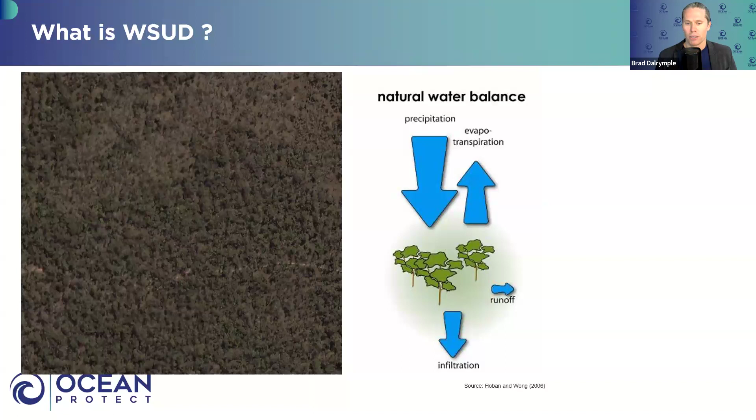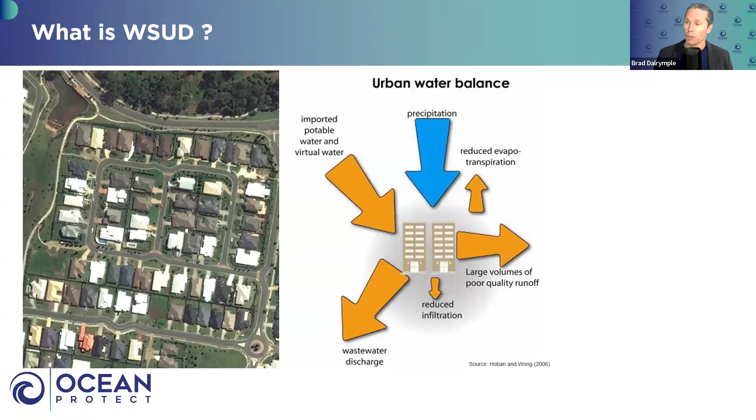But obviously, when we develop an area, when we put in roads, houses, etc., and often knock down a whole bunch of vegetation, we very much change the water balance. In terms of stormwater, but also equally, we require potable water to come into our urban areas, and we generate a lot of sewage as well. So the water balance fundamentally changes.

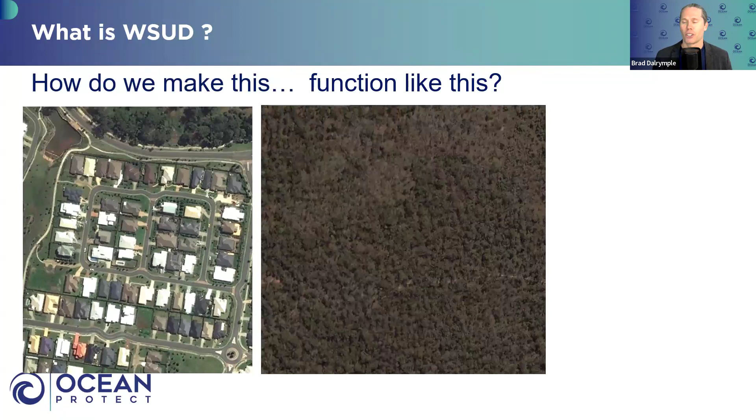So fundamentally, when we're talking about water sensitive urban design, we really want to make this function more like the natural catchment. And how do we do that? That's essentially what water sensitive urban design is trying to do - to get our urban environments to have a closer resemblance, from a water perspective, to our natural pre-development conditions. That means stormwater management, stormwater treatment, stormwater reuse, promoting infiltration into the ground, and ideally reducing our wastewater discharges and potable water consumption.

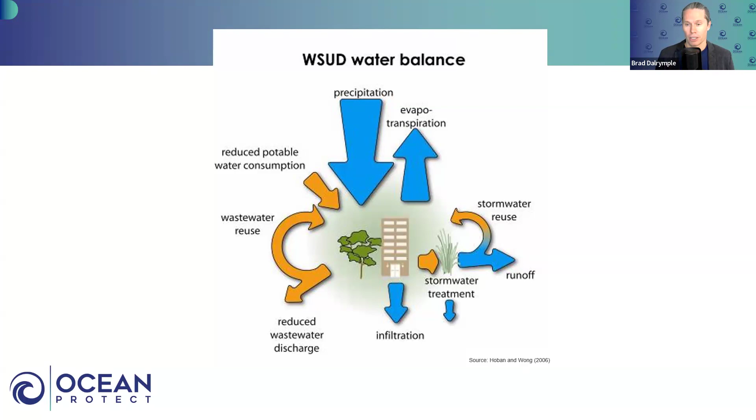There's a whole bunch of things we use potable water for that we could use other sources for instead - for example, toilet flushing, irrigation, etc. It's worthwhile noting that water-sensitive urban design isn't just about stormwater. There's a strong focus on stormwater, and I'll talk about a lot of that today, but it's just one element of the water cycle. So when it comes to water-sensitive urban design, we're really trying to achieve total water cycle management - minimizing potable water consumption and wastewater discharges as well.

Apologies in advance if you hear a couple of dogs in the background - I've got 4 at my feet as we speak. And it's also worth noting that water sensitive urban design is just one part of ecological sustainable development.

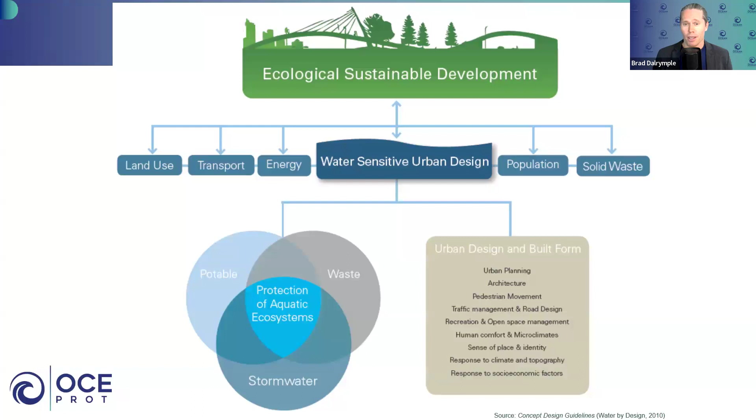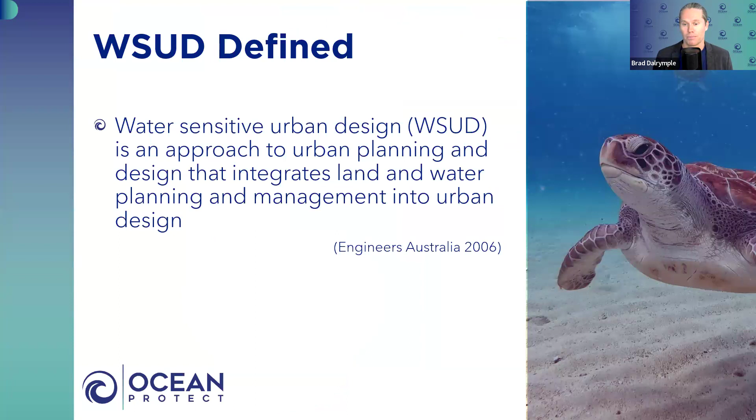But what is it in terms of its definition? This is straight out of Engineers Australia: water sensitive urban design, often shortened to the acronym WSUD, is an approach to urban planning and design that integrates land and water planning and management into urban design. So basically it's an approach, a philosophy - it's not an individual asset or series of assets, it's a way, an approach.

So why is it important? Well, if I just look at where I'm calling from today, in Southeast Queensland - apologies, I'm going to turn some dogs off, hang on. Apologies in advance for the loud dogs.

So in Queensland, in Southeast Queensland, we've gone through some major challenges, particularly in relation to climate change. Wivenhoe Dam just recently was down to critically low levels - we almost needed to truck water into our urban environments. Then shortly after, we went through a period of significant flooding, and then more flooding. Obviously climate change is playing a role there - we are basically seeing our climate change, with more extreme weather conditions, more flooding, more extremely hot conditions, etc.

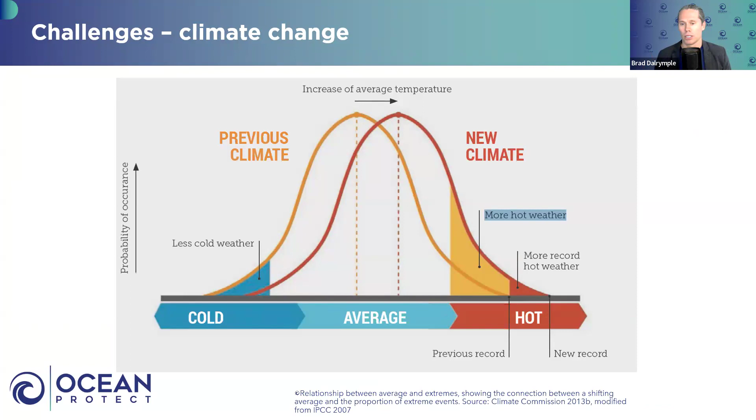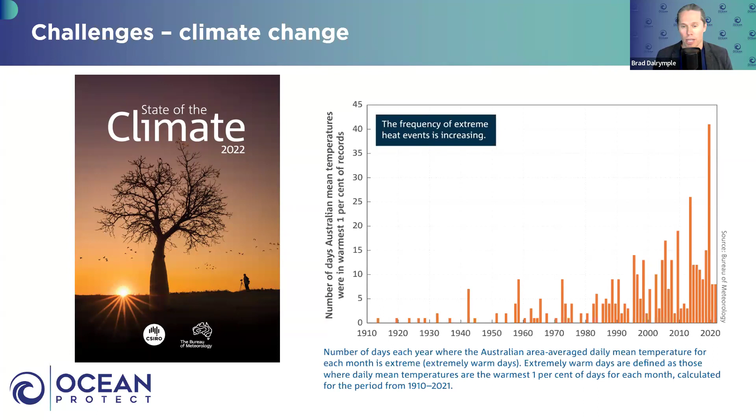Also, we're seeing an increase in the number of extremely hot days. This is straight out of the Bureau of Meteorology and CSIRO State of the Climate Report - long story short, we are seeing an increasing frequency of the number of hot days. So what does that mean? That means more pressure on our health services. Sure, it makes it easy to get out of bed on a cold winter's morning, but it also means a greater amount of people suffering from heat-related illnesses, which causes all sorts of dramas.

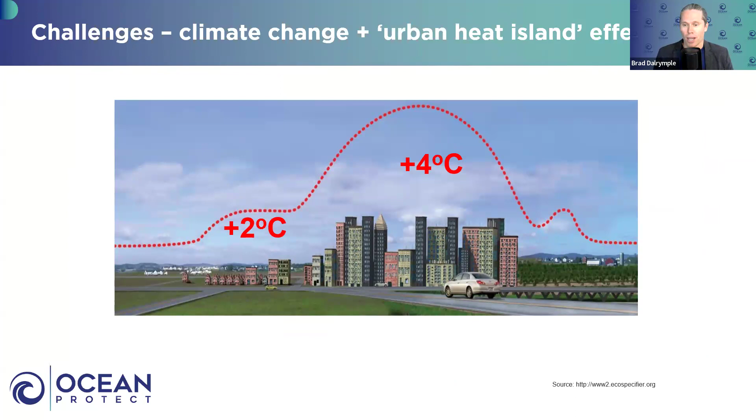Equally, we're seeing the biggest heat impacts in our urban environments, particularly related to the urban heat island effect - basically our urban environments are essentially hotter than our natural environments because of that increased imperviousness, etc. That only exacerbates the increased frequency of heat-related illnesses as well, and that's a massive issue. Some of our most highly populated, fastest growing areas in Australia are probably the most heavily impacted by the urban heat island effect and climate change.

Particularly in relation to Western Sydney, which is potentially Australia's fastest growing area, there's predictions that it might be unlivable to live there. So some of our fastest growing areas with the highest rates of population growth may actually be too hot for people to live in, which is a scary predicament to think about.

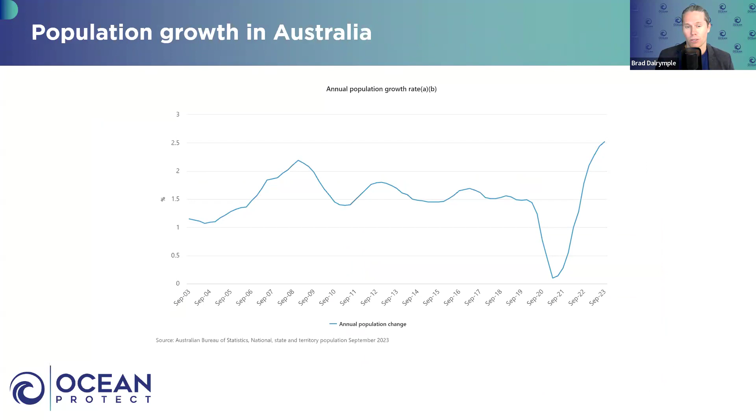So a lot of challenges, but equally, people still keep coming to Australia. I mean, why not? Population growth is still high. Obviously we saw a downturn in COVID, but people are still coming to Australia. Population rates are remaining fairly steady.

In Southeast Queensland, as an example, we have a pretty snazzy ecosystem health monitoring program. So the Healthy Waterways guys, or I think it's called Healthy Land and Water, have been collecting ecosystem health data on a bunch of our waterways and determining their condition. This has been going on for a very, very long time, and fundamentally we are seeing a decline in the health of our waterways.

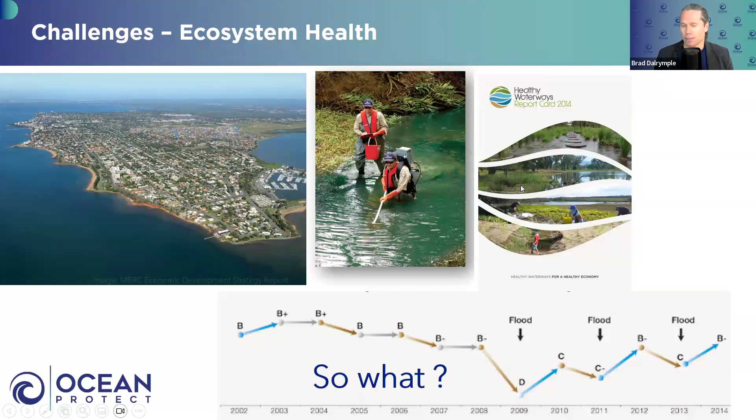And you might think, so what? Who cares? Does it really matter? Well, let me talk about that.

And you can imagine the potential economic impacts associated with the deterioration of the health of any of these waterways. So again, even if you only care about the dollars and cents, economic drivers for protecting our waterways are significant.

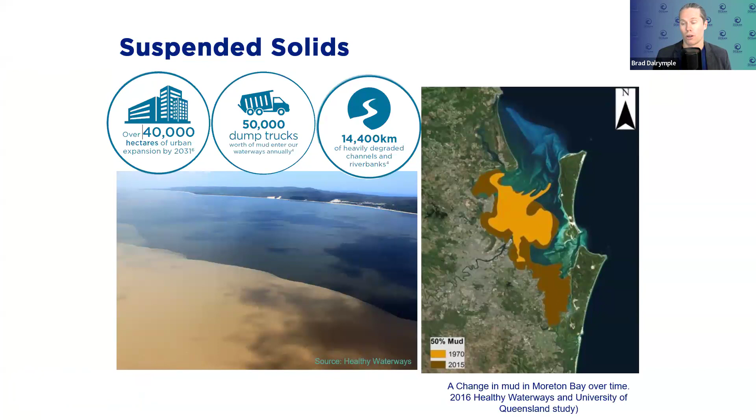And then obviously there's a whole bunch of social and cultural values - that's where basically near, or in, or on our waterways is where a lot of people spend their spare time. Obviously there's a whole bunch of ecological values for our waterways, and essentially water quality or pollution or other stormwater related aspects impact the health of our waterways. So whether it's litter, whether it's nutrients contributing to excessive algal growth and eutrophication, or whether it's just plain old dirt discharging to our waterways and bay environments, these have real ecological, economic, and social and cultural impacts when we don't protect our waterways properly.

And you might think, still don't care. Do you think the Australian public cares? This is one of the questions I asked you guys in the poll. Okay, do you guys care? Do you guys care about the health of our waterways?

There's a lot of things to care about when it comes to increasing population growth, but how do things compare? If I look at the poll, I'm just going to try and get the poll up myself. I'll leave the poll open because I can see something like 200 people have already answered these poll questions. So the first question I asked was basically this: with increasing population growth in Australia, what impacts are you most concerned about?

And Daniel can see the results as I can. But interestingly, the top ones - okay, I'm looking at 61% of people have said less green space is the top one. Interestingly, housing density at 54% is second top. They're live results, everyone's putting them through. Interestingly, marine and waterway health is 49%.

So I'll leave those polls open just for everyone's benefit. Please keep on putting your answers in.

But the reason I ask this question is because it's actually a survey that we commissioned - Ocean Protect commissioned a few years ago. We set the questions and we got an independent survey company to survey 1,000 people across Australia, all demographics, all age groups, and we asked them that question. So I'll show you the results because this for me was really interesting. This is the results of what the survey recipients thought in terms of what impacts they were most concerned about. I'm going to show you from lowest priority to highest.

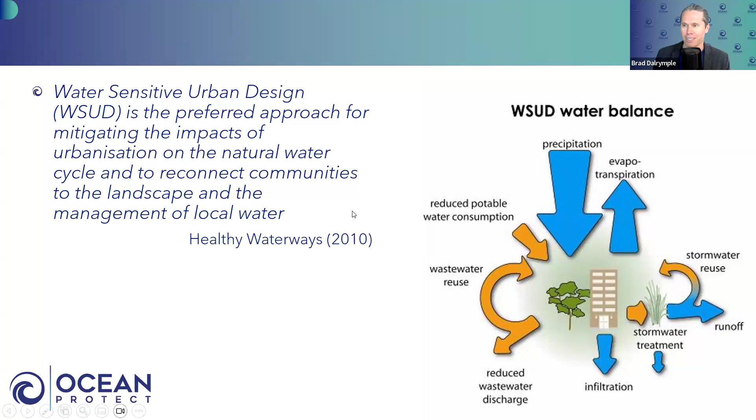Cool. Have I convinced anyone that it's important yet? I'm hoping I am. I'm hoping I have.

Best practice targets. Let's talk about those, and why they aren't really best practice targets.

There's a whole bunch of regulatory drivers for the stormwater management targets. In Queensland we've got state planning policy, environmental water policy, etc. Each state has their own similar legislative drivers, and sometimes they do vary from state to state and territory to territory.

In Queensland, similar to other parts of Australia, we have targets around both construction phase stormwater management - erosion and sediment control, which you'd see whether you're in Victoria, Tasmania, South Australia, etc - and post-construction or operational phase stormwater management objectives. They generally look something like the 80-60-45 or 85-60-45 targets, which reduce the pollutant loads discharged from a particular site.

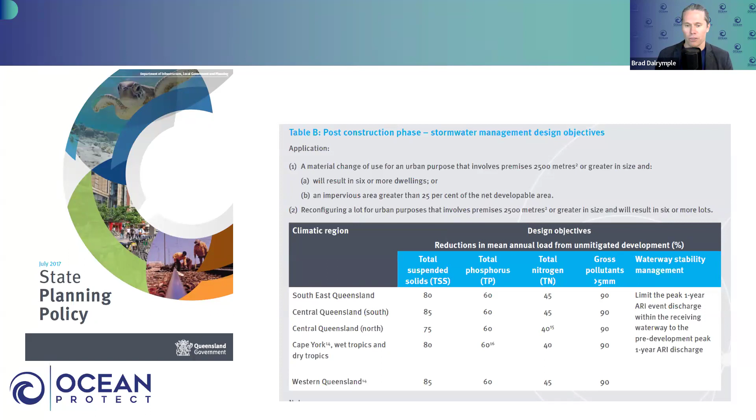They look at average annual loads, so you'd run a MUSIC model or something similar and work out what you need to reduce the pollution generated from your site relative to the development without any treatment devices. I'll come back to why that's important in a sec. In Queensland the targets might vary a little, and in different states they vary too, but something fairly similar to this is used.

What are they based on? It's a bizarre thing to talk about, but fundamentally, and there's a lot of discussion around this, they're based on how big, or what is practical to achieve on your site, for a bioretention system. The most stock standard approach to meeting stormwater management objectives, from my perspective at least, is putting in bioretention systems, and the targets are based on what's a reasonably practical target to achieve using them.

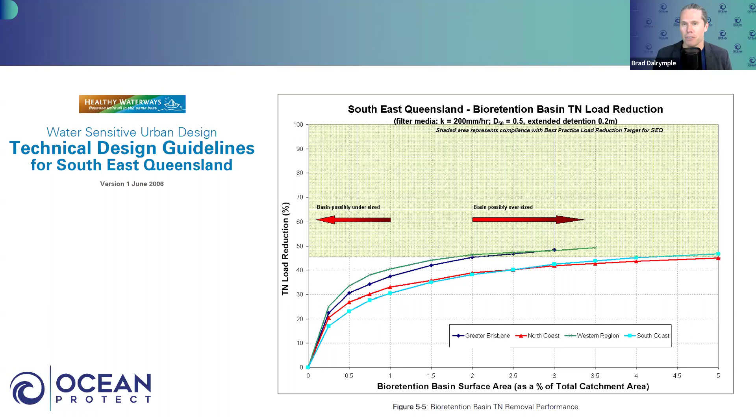Again, straight out of the Healthy Waterways Guidebook, our main capacity building organisation in Southeast Queensland for water sensitive design - they've changed their name a few times since this document was produced - the 80-60-45 targets, or similar, are based on how well bioretention systems can improve the quality of urban stormwater runoff without the treatment systems being excessively large.

The targets do not necessarily achieve a no-worsening of pollutant loads compared to current or pre-development catchment conditions. So again, the targets are based on what's practical if you use bioretention systems.

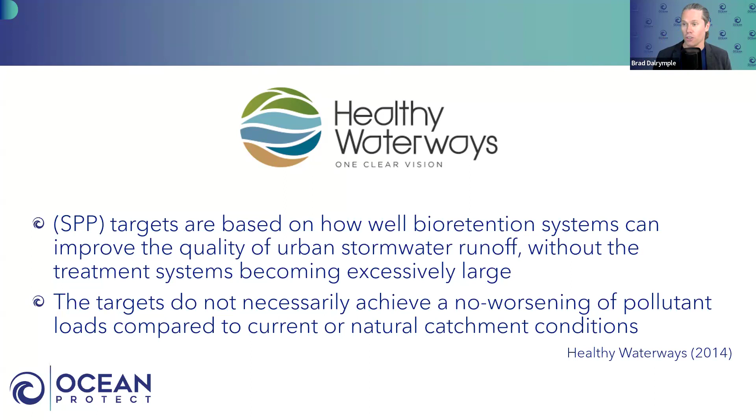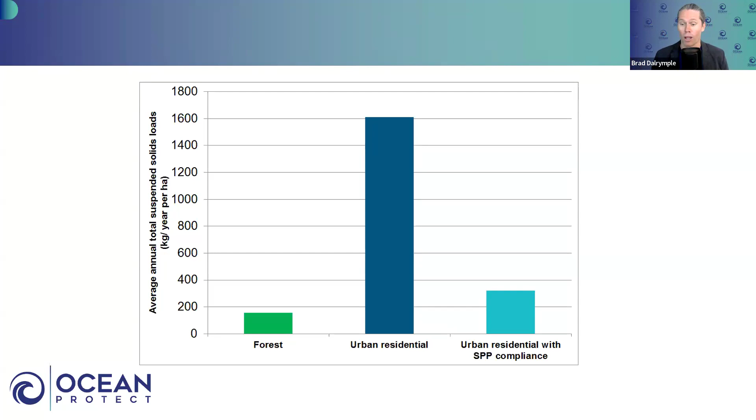Just to prove a point, these are results of some MUSIC models I've done for a conceptual 1 hectare site in Brisbane: a forested land use scenario, an urban residential scenario without any treatment, and the same urban development with an 80% reduction in TSS loads. The forest has a lot lower TSS average annual load relative to the other two scenarios, but for phosphorus, if anything, it's worse.

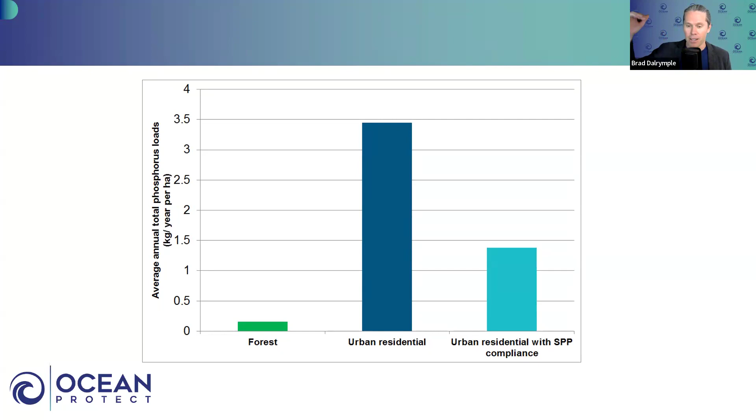So even if you do SPP compliance - a 60% reduction in phosphorus - you're still seeing a significant increase in phosphorus loads, and the same thing for nitrogen. Then looking at flow: in Southeast Queensland we don't have flow reduction targets, so we see a significant increase in average annual flow volumes relative to the forested scenario.

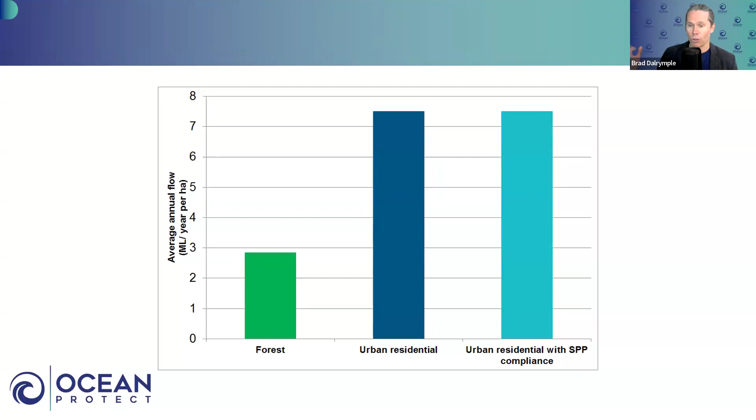We know with increased frequency and volume of flow, we see ecological impacts. This is something we talked about in the last fundamental session.

It's worth noting that in some parts of Australia, there's flow reduction targets. In Victoria, they've recently introduced flow volume reduction targets, and similarly on some developments in Western Sydney, they have flow reduction targets as well.

But there are some key questions to ask around the appropriateness of these targets, and I'd really query their appropriateness. What is the scientific basis for these targets? We all know increased flow, volume and frequency does impact ecological health, but I really doubt the applicability of an annual volumetric flow reduction target.

Are the modeling methods appropriate? We're using MUSIC typically. Is that an appropriate method to use, recognizing there's often very little calibration being undertaken, and we're using historical climate data, et cetera?

Are the assumed water losses realistic or sustainable? We're often requiring water losses, whether it's exfiltration or harvesting. I've seen misting sprays proposed just to lose water. Is that sustainable? Is that going to be achieved long term? Are exfiltration rates going to be achieved, recognizing there might be blockages long term?

Are the targets practical at all? Also recognizing that often they say you just can't have as much imperviousness in your particular area, does that mean urban sprawl is going to be exacerbated?

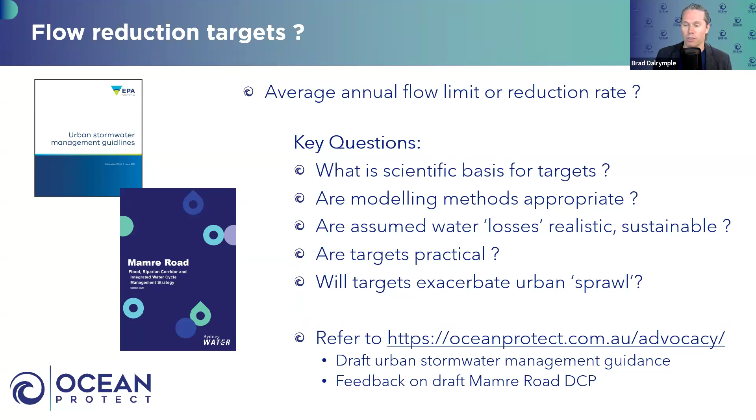I won't go into any more detail about this. There's a whole bunch of further information on the Ocean Protect website, where we've actually provided feedback to Vic EPA and Sydney Water around the appropriateness of these targets. If you're keen to check that out, jump on that website.

But fundamentally, are these best practice targets? From my perspective, they are very generic. They're typically based solely on what MUSIC predicts bioretention can achieve, and that's based on historical climate data, potentially outdated or incorrect pollutant export properties. We're assuming the export properties assumed in MUSIC guidelines for urban, residential, commercial and industrial land uses are appropriate, and there's a lot of science to indicate that they are not.

Also, the biggest one from my perspective is that we use the algorithms in MUSIC for the bioretention node, which are based solely on laboratory scale studies. A few years ago, 15 plus years ago, some scientists looked at microcosms in a lab environment, typically in Melbourne, but some in Loganholme. They dosed these bioretention systems in a lab environment with synthetic stormwater, and that is what's basically used for MUSIC modeling of bioretention systems. That, for me, is not appropriate.

We definitely need real-world monitoring to demonstrate the efficacy of bioretention systems. I really think these targets are a key reason why we see oversimplified and generalized outcomes, i.e. bioretention is just the gold standard for some reason. We often see very high rates of operational problems with these bioretention systems, and often there's very little appreciation for the downstream waterway values.

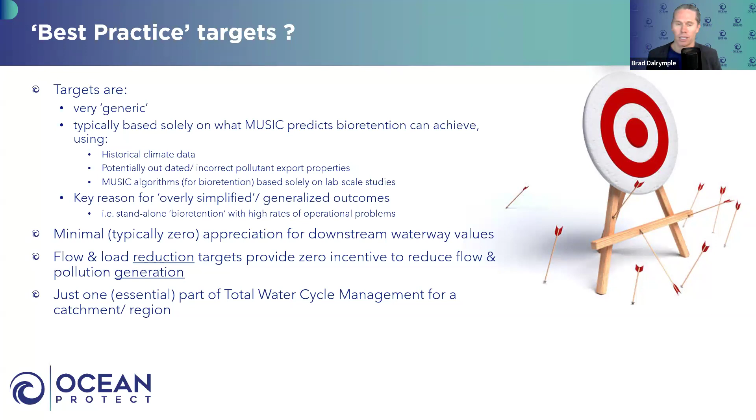It's also worth noting that this is a multidisciplinary endeavor. It's not just some engineer with a model working out how big your bio needs to be. It should involve a whole bunch of stakeholders, including eventual asset owners or managers.

I'm going to show you a whole bunch of examples of stormwater treatment assets that are often integrated to achieve water-sensitive urban design. It's probably a sad reflection of how I spend my spare time taking photos of these assets, but I'll just show you the examples. I won't discuss potential operational problems - I'll save that for another day since I'm conscious of everyone's time.

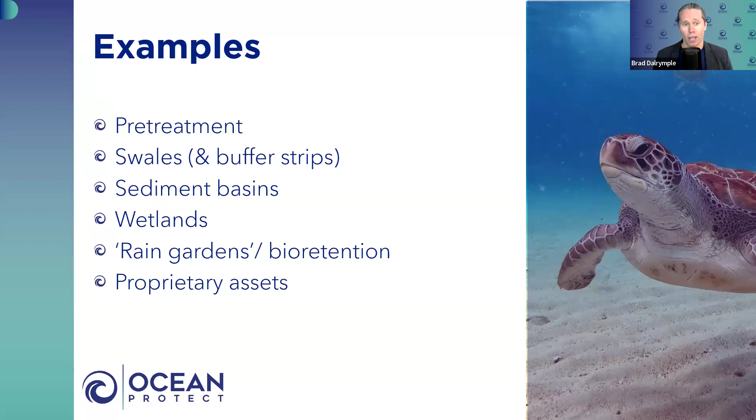These are probably the more standard examples we see on most developments for urban environments. I'll run through a whole bunch of examples with the time I have available. Pre-treatment first - this is about removing litter, plastic pollution, and solids as best I can prior to discharging downstream, whether into a waterway or a downstream treatment device.

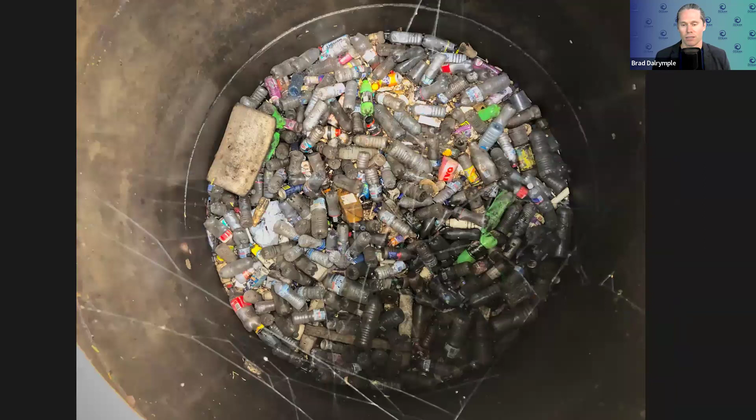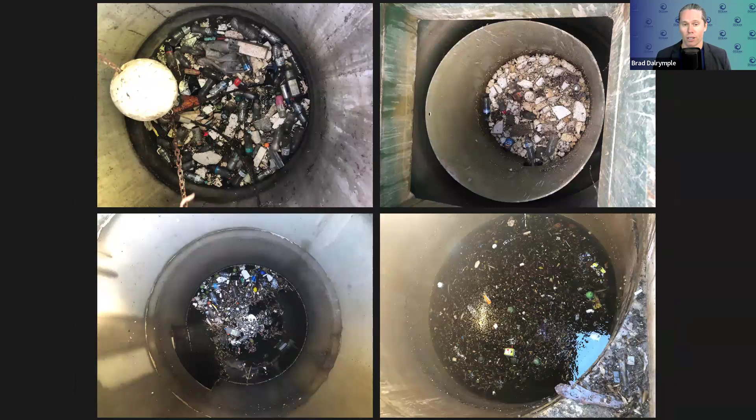This stuff will just smother plants, basically everything. It's a lot easier to come in with a sucker truck and rip this stuff out of a GPT than to try and manually remove it from a wetland or bioretention system.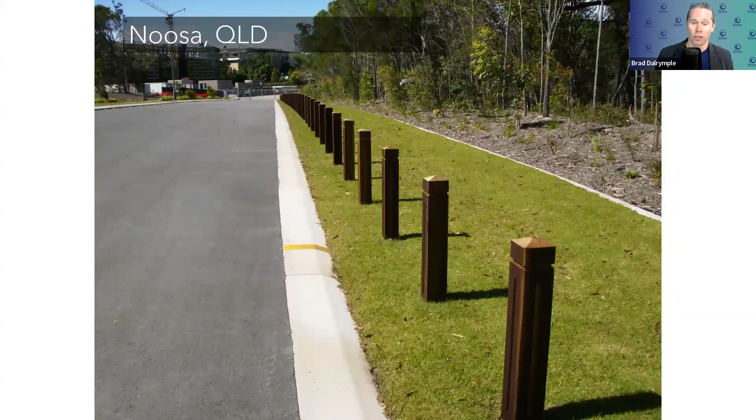Swales and buffer strips are pretty simple. They basically offer an alternative to curbs and guttering or concrete channels. They work by trying to slow down water, promote infiltration, and promote enhanced sedimentation with the vegetation, along with a bit of biological uptake of the pollution.

You can see these devices do need a fair bit of space and often need very specific site conditions. Swales are pretty much only good for sites with gradients between 1% to 4%. If it's too flat, you'll have ponding; if too steep, you'll have erosion and scour. So they're not commonly integrated, but the concept is great - slowing down water, providing enhanced sedimentation and filtration - and they can be big systems as well.

Sedimentation basins are all about slowing water down and promoting sedimentation. This is an example in Coorparoo in Brisbane - Bowie Flat wetland, or Bridgewater Creek wetland if you're a local. This is the sedimentation basin, and this is the macrophyte zone.

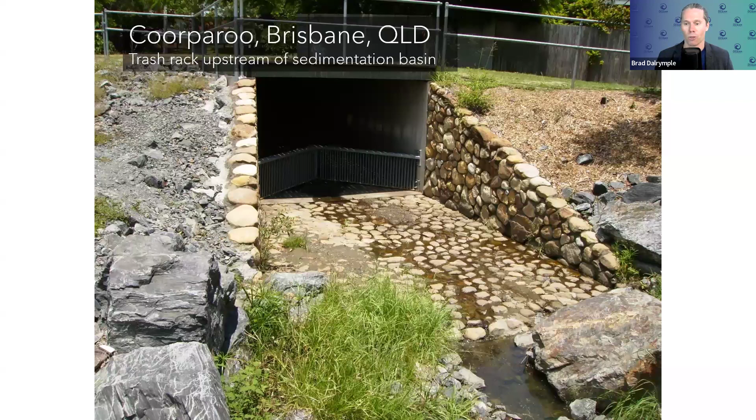Then it goes into the sed basin, and low flows discharge into the macrophyte zone through this outlet structure. You can drive in with an excavator to clean it out, which won't happen - trying to clean out a sed basin by driving an excavator in is not a very good idea at all, but that's another story.

Downstream of the sed basin here is this macrophyte zone, which is planted out. So typically wetlands are shallow, densely vegetated systems, promoting sedimentation, enhanced filtration, slowing down water, evapotranspiration, and potentially providing habitat and ecological values.

One thing to keep in mind is that you do need to pre-treat the water, since you will attract wildlife to these environments. There's growing awareness that we've got to be careful about creating ecological traps for wildlife, with particular concern around PFAS. Recent studies show some of these wetlands can accumulate pollution, and some of those pollutants can be very nasty to the ecology attracted to these wetland environments. So just something to keep in mind.

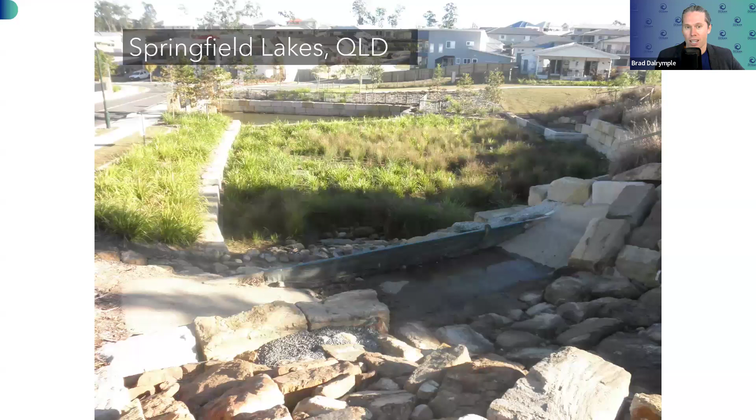Bioretention system at Springfield Lakes at the promenade. Another one at Springfield Lakes, this is the creekside - again, densely vegetated, water comes in and soaks through the soil.

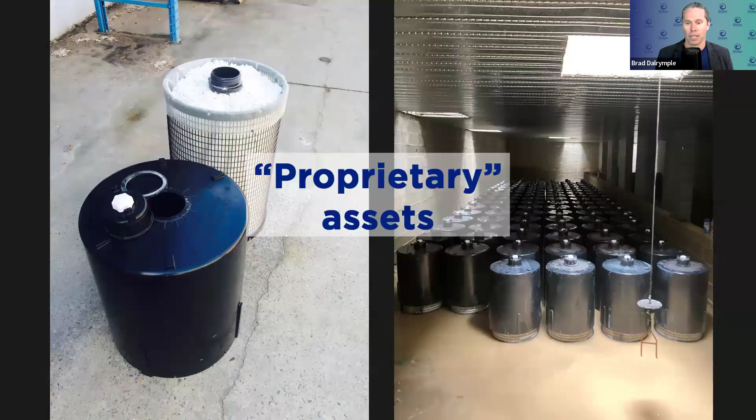And these are, again, commonly featured in urban development. Off the top of my head, Ocean Protect have about 66,000 different proprietary assets in the ground. I think storm filters, we've got about 30,000 plus, and they capture a whole bunch of really nasty pollution you don't want in the downstream waterway environments.

So these are the storm filter cartridges I showed before. This is on the left-hand side, a close-up of the PSORB media, before it was installed. On the right, it's after it was installed, so ready for a maintenance intervention. We just suck out that media and replace it with new media, and use all the other components for the next cartridges as well.

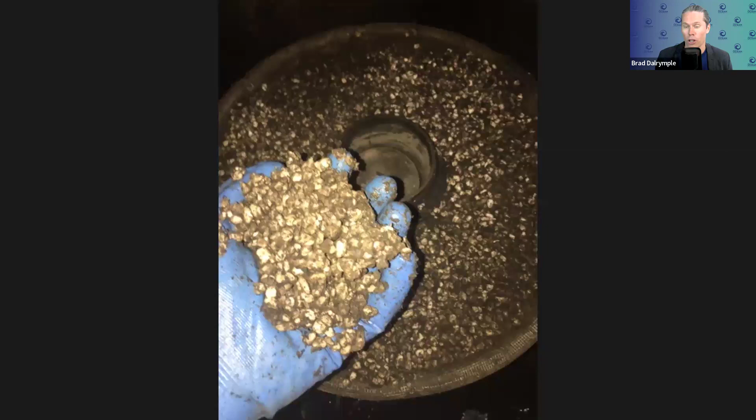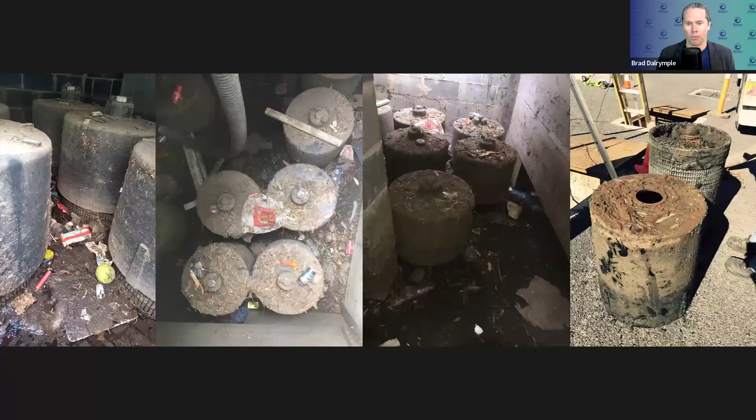Long story short, it captures a lot of pollution, a lot of really nasty, manky pollution. A key fundamental aspect of water sensitive urban design is stopping this pollution, preventing the high pollutant loads that don't appear in a natural environment. There's a whole bunch of pollutants we see in devices that just do not appear in a natural environment, and you do not want this pollution in the downstream waterways. I'd certainly challenge anyone who thinks a wetland or bioretention system is good for stopping a lot of this stuff, because it'll often just kill the bioretention system.

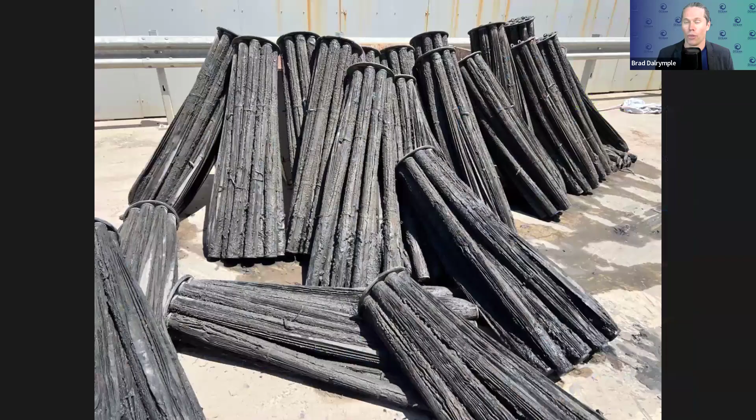These cartridges need to be replaced roughly every 2 or 3 years, off the top of my head, depending on the site - sometimes they're a lot worse than others. So that's it, that's a crash course in water sensitive design. I'm actually on time. Thank you so much for everyone's time.